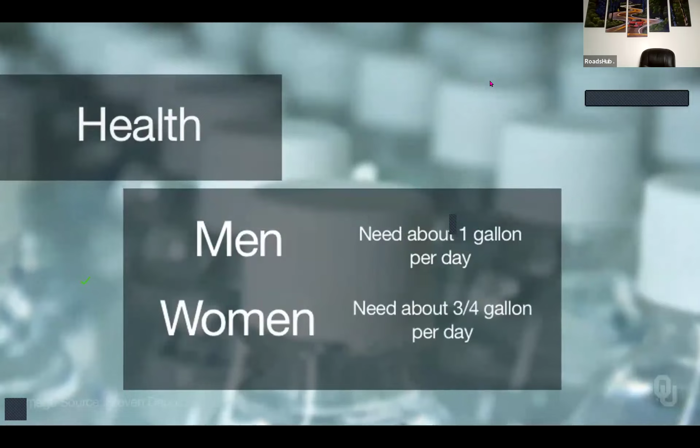These three categories are health, sanitation, and hygiene. Water is also used for cosmetic purposes when I shave or wet my hair to keep it in place. In fact, regarding health, men need to consume about 3.7 liters a day, or about a gallon of water, and women need to consume about 3/4 of a gallon. About 70 to 75% of our human body weight is water.

The blood is 82% water, the human brain is 85% water, and it is no wonder that some of the early symptoms of dehydration are fuzzy short-term memory, trouble with basic math, or difficulty focusing on small print, because your eyes use a lot of fluids to do their work.

What does water do in and for the body? It serves as a lubricant, forms the base for saliva, and forms fluids that surround the joints. It regulates body temperature, for example through perspiration, and helps alleviate constipation by moving food through the intestinal tract and eliminating waste products, making it a fine detox agent. Finally, it regulates metabolism, which is how our body gets energy from food.

So our thirst is a natural signal to our body that it needs water. And when people don't drink the water they need, the only other water they can get may be dirty water.

Water is used to do two things regarding sanitation: to dilute the waste and to move it to a place where it can be treated. For many centuries, before there were very many people on the planet, human and animal bodily waste could be released into a river or stream. When the waste is sufficiently small, water has enough volume to dilute the waste and render it harmless to people living downstream.

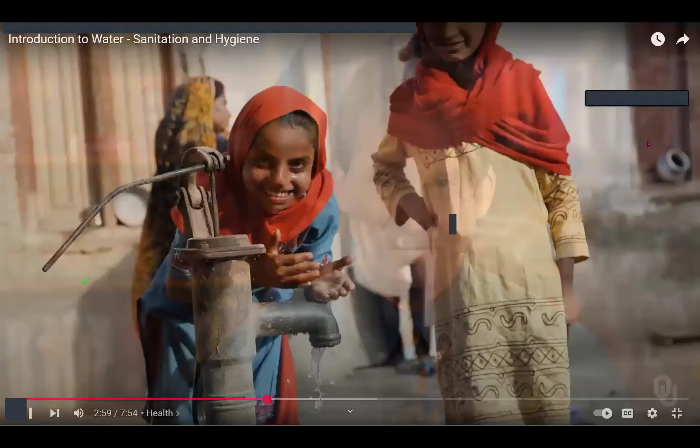The world and the amount of water it contains has and will forever be the same. It will not increase. But as populations have increased, it has become much more difficult to find enough water to dilute waste sufficiently. This is especially true in the industrial or developed world, with people moving into larger and larger cities, as you heard during the last lecture about London, Chicago, and Milwaukee.

This brings us to the second usage of water in sanitation: to carry waste away to a place for it to be treated or disposed of.

A very old system still in use today is called the septic tank and system. The water carries the waste by gravity from the home to an enclosed tank. There the solids settle to the bottom, and the liquid water flows out the top of the tank into a drain field where it percolates into the soil. There, natural bacteria in the waste and in the soil have time to degrade the waste and make it more inert, or safe. Septic systems can be very effective ways of using water to transport wastes, but only in places where population densities are small and there is plenty of land for the water to be spread out.

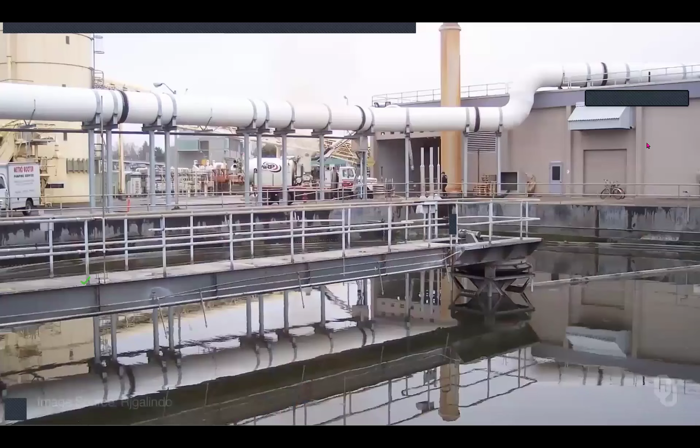A more modern system, used in large developed cities, is one in which water carries the waste to a centrally located wastewater treatment plant. There, natural processes are mimicked using engineered systems, in effect doing the same thing the bacteria would do in nature, in that soil we spoke about, but in a more controlled and speedier fashion. Once treated, that water can be re-released into a river, lake, or stream, where it will not have an adverse effect on the ecology of the water body or on people living downstream.

The third important category is hygiene. It refers to those practices that we do to maintain and preserve our health. Specifically, hygiene in the home and everyday life settings plays an important part in preventing the spread of infectious diseases.

Many of these practices require water: hand washing in the sink, proper rinsing of food, care and cleaning of domestic animals, and other practices considered proper hygiene, including bathing regularly, washing scalp hair, keeping hair short, wearing clean clothing, and brushing one's teeth. Some practices are even gender specific, such as those used by a woman during her menstrual cycle.

Hand washing is probably the most important single behavior that can be implemented in a developing country to reduce the risk of infectious diseases. Recall how every hospital has numerous hand washing stations throughout the patient care floors, and visitors are required to wash their hands before entering a patient's room.

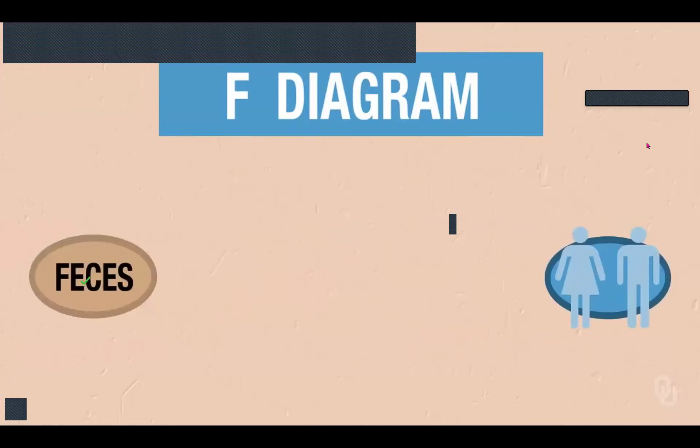Let's take a look at what is often called the F diagram. It shows various pathways that pathogenic, disease-causing bacteria can take from feces to future victim, that is, you or me. The fecal material, if not deposited in an isolated place such as a latrine or a toilet, can easily find its way into water, into fields where crops are grown, or onto the fingers of children who are playing. Finally, flies often carry bacteria from the feces to your food, which is why we often cover our food.

Some of these pathways lead directly to your mouth, as when you drink contaminated water or touch your dirty fingers to your mouth. Or they lead to your food, which of course leads to your mouth. Once in your mouth, you are at increased risk for the diseases that these pathogenic bacteria will carry.

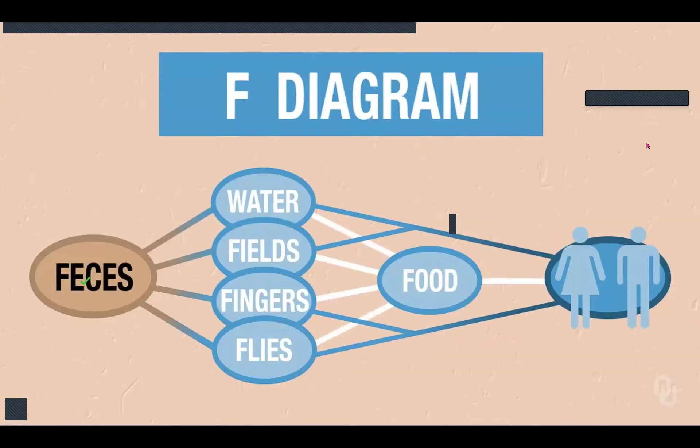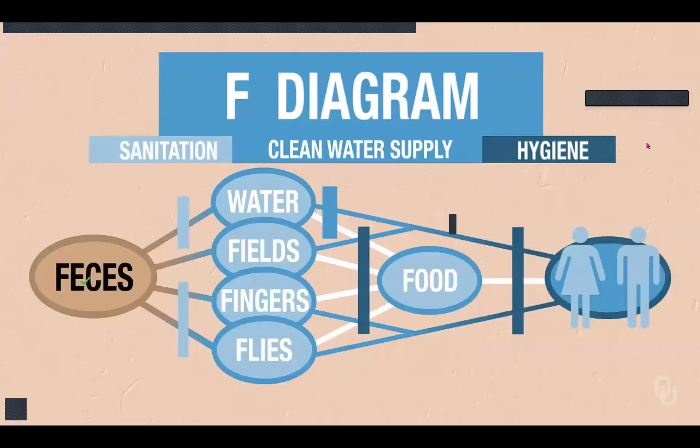It has been estimated that almost 1/10 of the global disease burden could be prevented by improving water supply, sanitation, hygiene, and management of water resources. That's all diseases. Childhood underweight causes about 35% of all deaths of children under the age of 5. An estimated 50% of this underweight or malnutrition is associated with repeated diarrhea or intestinal nematode infections as a result of unsafe water. Such underweight in children is directly responsible for about 860,000 deaths per year. But we'll talk more about these diseases in the next lecture.

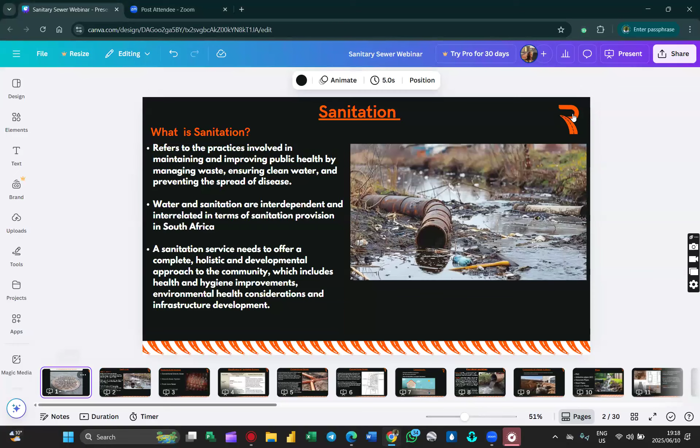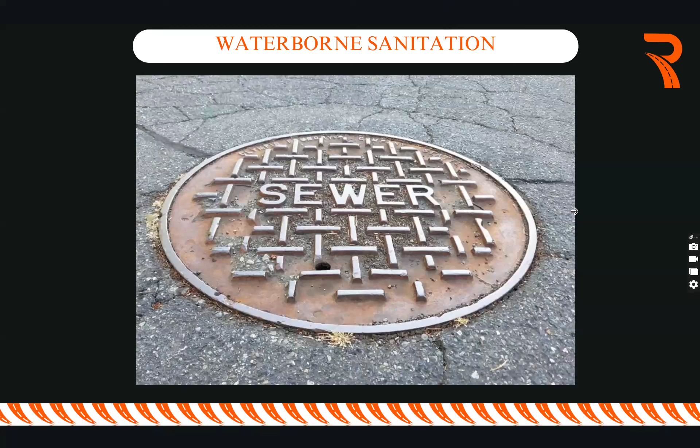So if you can see my screen, you can see that there is Waterborne Sanitation there, and you can see that manhole that is written sewer. Okay, thank you so much, Collins. I see someone putting a tick on my screen. Thank you, you can erase it as well.

I think that was a very good introduction from Engineer James when he was trying to engage you and ask you guys questions about sanitation. What is sanitation and why is it important? Why should we bother? Why should we think about this?

I like the statement that he uttered, that I always have this argument with some of my friends that are doctors. They think that their profession is more important than us. And of course, being an egotistic person I am and being an engineer, I also think my profession is important. Then I say to them, listen, if you make a mistake, one person dies.

I'm not saying life is not important, but if you as an engineer make a mistake, particularly in the area of sanitation, more lives are at risk. You'd realize that you compromise the health of generations, not only your generation, but generations to come. So let's say you're designing a sanitation system for an urban area, and you do a shoddy job, just give it a few years, your system will fail.

Whenever we design systems, whenever we design infrastructure, one thing that you also need to know as an engineer is that you're designing for something that is going to outlive your existence. Probably you're designing for 2 or 3 generations after you. So you also need to have a foresight of the impact that whatever project you're working on has.

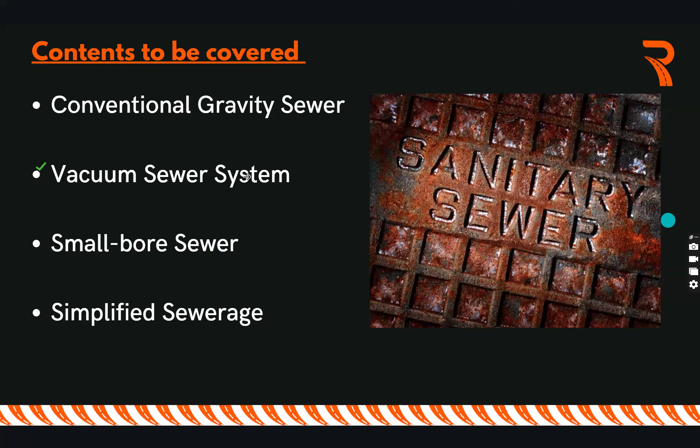Very soon we're also going to be talking about the employment of your sump and your pump station as well in the sector of sanitary sewer. It's also a big thing. How do you design a sump? How do you size your pumps, your rising mains, and all that stuff? It's also still part of sanitation. So it's quite big, but for now we're going to be talking about this. This is what we're going to be drilling deep into in this webinar.

Usually where water is not needed, there is what we call an on-site sanitation system. If you've grown up in the rural areas, or if you have families in rural areas - predominantly most of us are Africans, you probably have a rural area where your people come from - those places are less developed, and there's no access to water. Usually there's like one borehole that services the entire community, so water is not readily available. There is water in the community, but we do not have water that's readily available in your house where you can open a tap and there's water coming out.

So in that type of setting, we use what we call on-site sanitation systems - your pit latrines. I'm sure you guys are aware of these ones. I grew up knowing them as Blair toilets - I'm not sure if you guys are familiar with that term. We have pit latrines, ventilated improved pit latrines - there's a lot of technology going into that. But the most important thing you need to understand is that these are on-site, happening on site, because we do not have water.

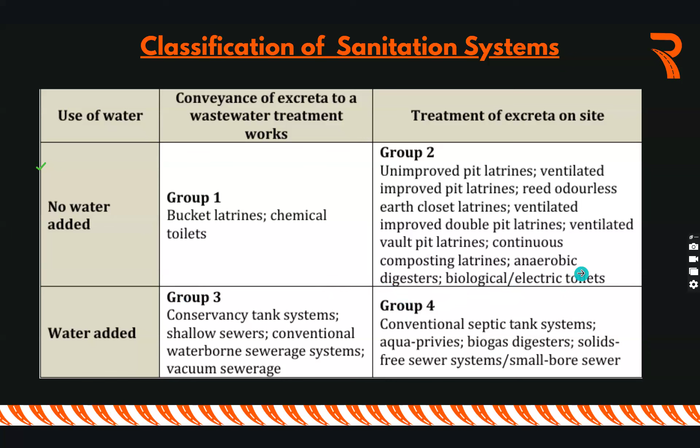Now let's start with conventional sewers. These ones are quite easy and quite straightforward. So a conventional gravity sewer system requires a water supply. Let me just quickly grab my pen - I need to be writing something here. Okay, let's take note: water supply.

So a conventional gravity sewer system requires a water supply, a sewer reticulation system, bulk sewer lines, and a wastewater treatment works. These are four things needed in your conventional sewer system. So we need a water supply connection - that's the first thing we need. We need to have an abundance of water. If we do not have a water supply, then we're not even thinking about a conventional sewer system.

As engineers, we need to start being creative and thinking about something. So if ever you've got your water supply, you know that, okay fine, there's a chance I can start thinking about a conventional sewer system. Then it would need you to design a sewer reticulation system - a network of underground pipes that carry that sewage from where it's produced to the treatment plant.

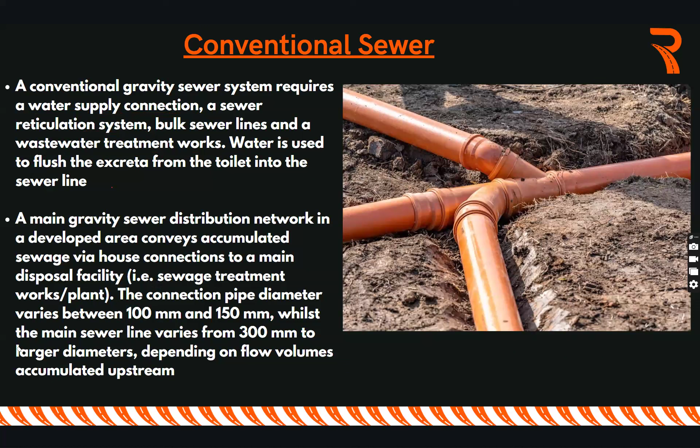So the moment you have water, you're now thinking, I'm just using a conventional sewer system. This is the most commonly used sewer system. I'm sure most of you guys know this — if you have been a WASH engineer before, or if you've ever worked in any design capacity doing land development projects, you have probably come across conventional sewers.

Usually, I'm sure you guys have seen a house plan before and seen the detailing of plumbing. These house connection lines are usually laid at a slope of 1:60. The sewer line on its own has no set slope that you can use. This is where you get into the details of design to see which one is the acceptable slope, depending on the manuals you are using, because you have to adhere to the manuals in your country. However, the science behind the water mechanics still remains the same.

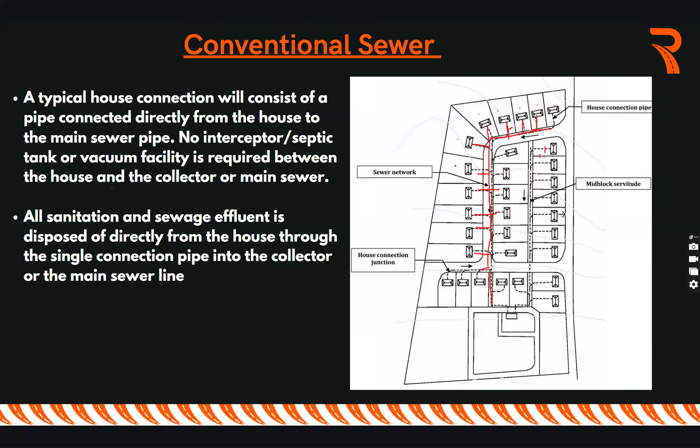There is also the gray water - the water you produce when you do your laundry, wash your dishes, or clean your house. You usually chuck all that water into the drainage. Most people throw it maybe into the garden to water their garden, but in most cases you throw that water into the drainage. So it will probably be connected by a pipe at a certain slope, that will then connect to the lateral sewer. So this is the sewer we're probably going to be dealing with - all the urban areas probably have this type of connection.

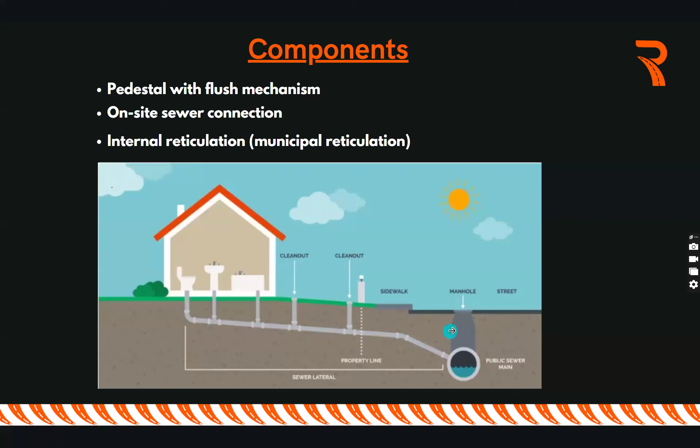So let's just quickly go through it. What are the main design guidelines? These are the three key takeaways that I want you guys to think about whenever you're looking at conventional sewers. The first thing is your cleansing velocity.

Your cleansing velocity. There is a minimum and a maximum velocity, with typical values ranging from 0.7 meters per second to 2.5 meters per second.

Now let me explain the concept of cleansing velocity. Remember, these pipes are laid underground. So once we lay them, we won't be having daily access to these pipes. So we have to design these pipes in such a way that they've got the ability to clean itself.

What does that mean? It simply means that there is going to be a moment where there is going to be sedimentation build up in the pipes. So we need to ensure that water is going to be moving at a certain slope so that there is no sedimentation build up. You understand?

So in the event that your system cannot reach cleansing velocity, sediments will build up. I'll give you an example. Like we are all in Africa. I've been, particularly where I lived, I actually grew up in low-cost housing. So what would happen, one thing that I've seen, particularly with mothers, is when they are scrubbing their pots, they tend to use sand or a special type of sand.

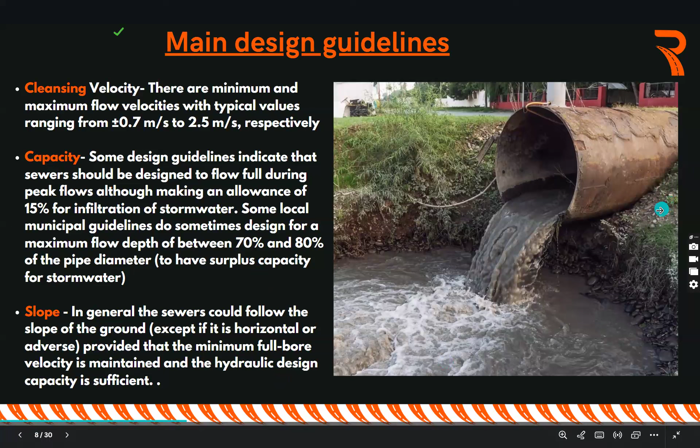So the reason why I'm spending more time on this one is because it's the most commonly used, probably that most of you guys are going to be interacting with.

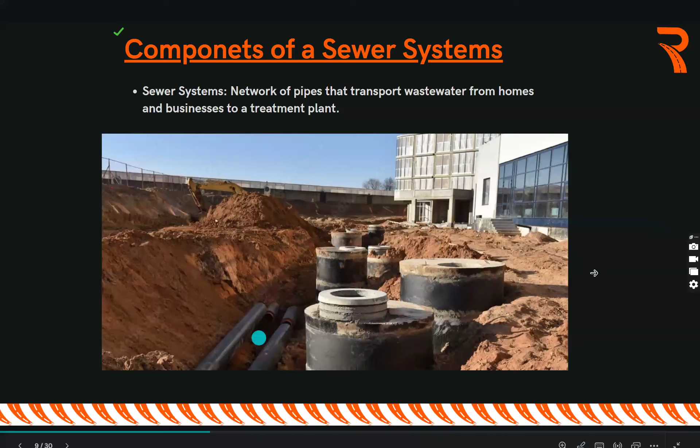Now, the components of your conventional sewer, you've got what we call your manholes. As you can see, these ones, you've got your manholes, and then you've got your pipes. So I'm going to start with the pipes. As you know, we've got a number of pipes that we use that are at our disposal. We've got PVC pipes, asbestos pipes, concrete pipes, steel pipes, cast iron pipes, glazed earthenware pipes.

Now, particularly from where I come from, mostly we are now using PVC pipes. They are mostly popular now, and glass reinforced plastic as well. It's becoming a lot more popular, particularly if you're doing your force mains and your trunk sewers. Asbestos, it's been a while - these are very old pipes that we used back in the day. I'm not so sure if they're being used currently in the system. Then you've got concrete pipes, usually for your trunk lines. Concrete pipes are usually used, but I've seen a lot more people move into GRP. Then steel pipes - there are certain situations where you can use steel pipes as well.

So one thing that you also need to know is that wastewater is not only sewage. So maybe you might be designing a sewer system for, let's say, an industrial area that is producing toxic material. So maybe PVC would do, or maybe steel pipes would do, or maybe cast iron. It depends on the type of project that you're working on. So these are some of the pipes that you need.

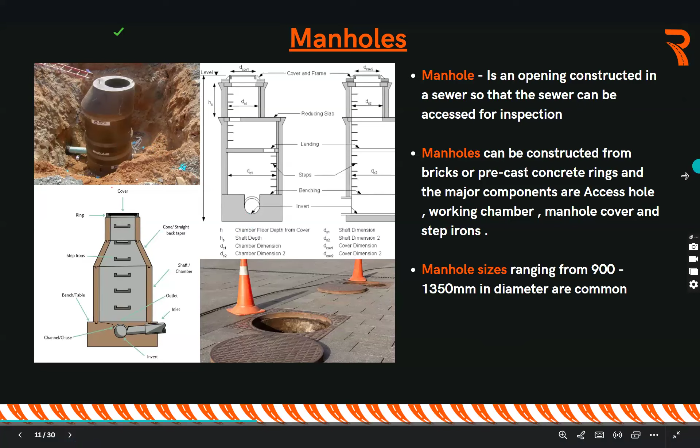Literally, most of us, all we do is we take a shower, and after we leave the shower, we don't even care where the water that we showered is going. We don't care. When you flush your toilet, you are done, you do what you do, it's very convenient. When you wash your dishes, you are done. There is no 'okay, I need to fetch water, I need to do this.' It's very convenient, that's why it's mostly preferred in the urban areas.

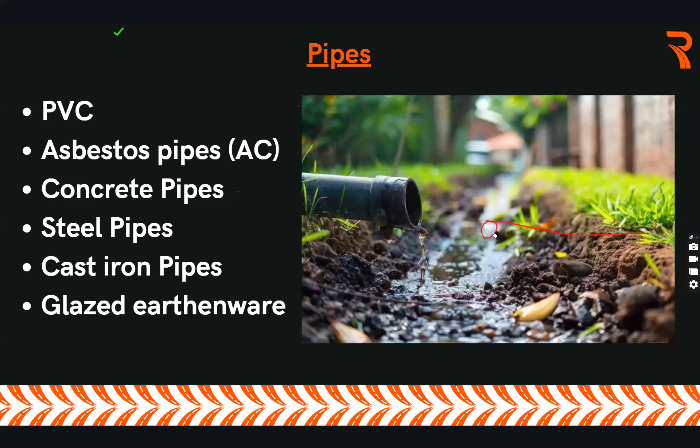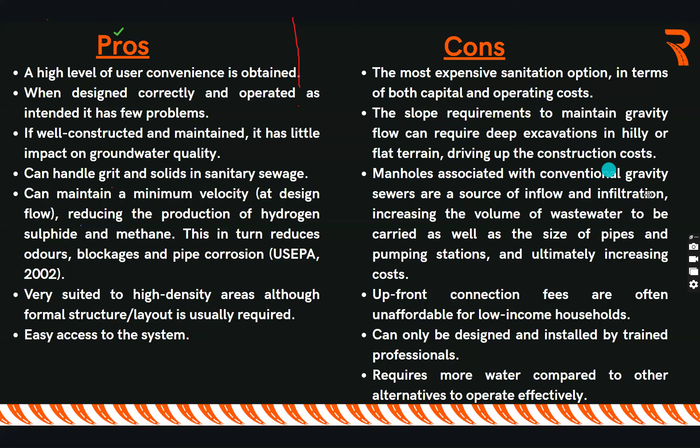For instance, I learned how to design a road using Kenyan manuals, and I'm quite comfortable even in my own country using Kenyan manuals, and I built on that. When I started using my own South African manuals, SANRAL and other manuals, I built on that too. But it's still the same - the concept of design is still the same.

I took a lot of time with that one, so I'll probably try to run through this. Then we have got vacuum sewers, right? I don't know if any of you have heard about vacuum sewers, but I was actually reading a very interesting project where they employ vacuum sewers. Let me just quickly run through this.

So vacuum sewers use what we call differential air pressure to move the wastewater. A central vacuum pump station is required to maintain a vacuum, a negative pressure, on the collection system. So as you can see, you have a house connection here, then your sewer goes into sort of like a pit sump - you've got a sump already in your house.

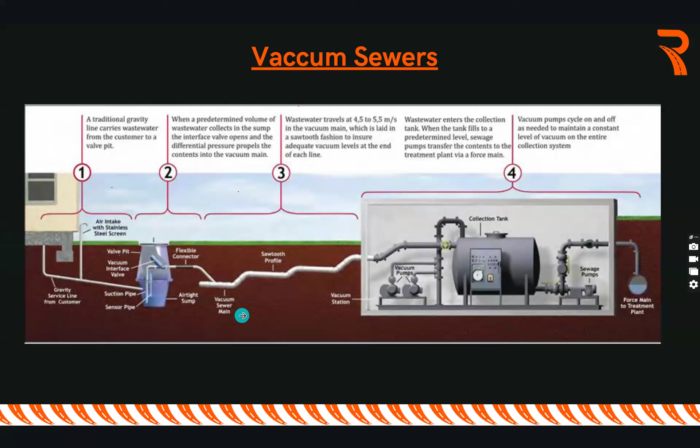Now that sump will be connected to a vacuum pump. So because of the negative pressure created by the vacuum pump, your sewer will move into the collection tank. Now, as you can see, there's a lot of moving parts there, and you can also see that it's capital intensive, because we have vacuum pumps and each house has to be equipped with a sump that temporarily collects the water, and all these other things.

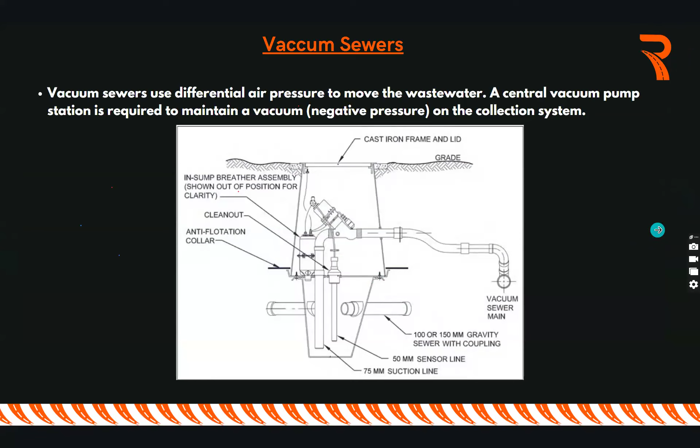So one of the things you need to know is that it's not a very common application for a sewer system, but you also need to understand where it's most applicable, because remember, for conventional sewers, we said always follow the slopes. So what happens when you go to a place that's relatively flat, or very rocky, or the soil is unstable?

Let's say you want to do a sewer system in the desert - the soil is unstable, or it's a rocky or flat terrain, like in the Cape Flats, which is very, very, very flat, or in an area where there's a high water table.

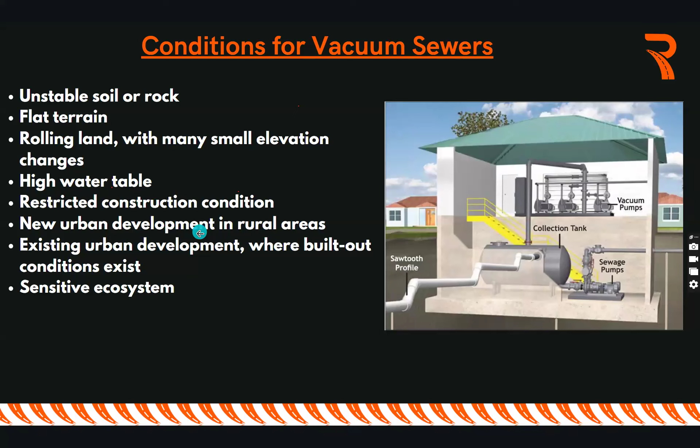So these are the conditions for vacuum sewers that you need to know. The ones that are most obvious, like I said, are flat terrain, unstable soil, high water table. Those are some of the things that you need to know.

So vacuum sewers, I'm sure you guys have heard about this site in Palm Jumeirah in Dubai. I was actually watching a documentary sometime last week on how they built this. This is an artificial island. Because it's an artificial island, they had to import about 4 million metric tons of stone and remove some sand. All of this was just water here, so they artificially made all of this.

As you can see, there is no slope in this particular area. This is just an example I could find on the internet. It's relatively flat. In these type of instances, they actually use vacuum sewers. I also see mostly island areas use vacuum sewers because it's also flat terrain, and most of them probably have unstable soil as well. So most of the sanitation they can employ in that particular area is vacuum sewers.

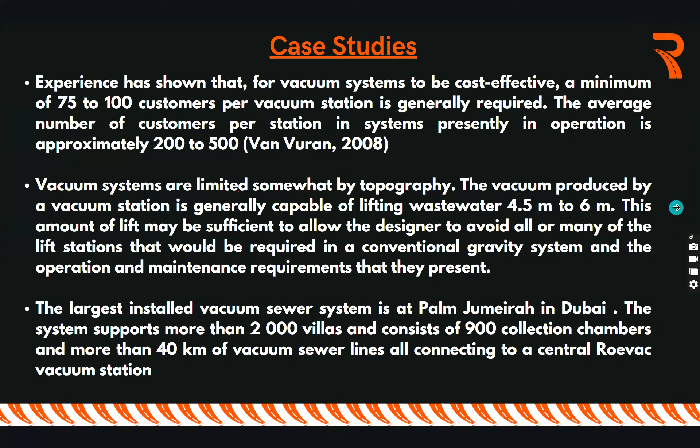So this is just a case study that I came up with. I'm not going to go much into detail on that one, I just wanted to share that with you guys. Should you need the notes, you can reach out to our captains, they should be able to provide the notes for you. There are pros and cons to everything as well, so I'm just going to speed through that one.

Now this is one I also want to talk about because it's mostly applicable to us in Africa: small bore sewers. I've actually done this one, that's why I'm passionate about it and wanted to share it with you guys. Small bore sewer systems, or small diameter gravity sewers, are also called solid free sewers, or septic tank effluent gravity sewers.

Excuse me, someone has their mic unmuted and it's distracting me. Vincent, can you please mute your mic? Vincent, if you can hear me, thank you sir, thank you.

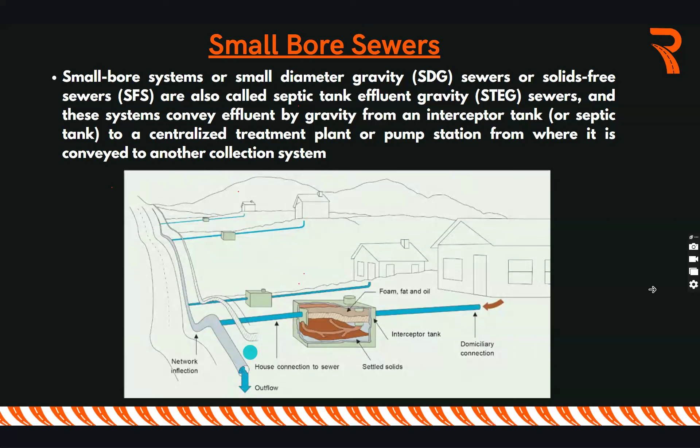You need to understand that small bore systems, also called solid-free sewer systems, are a system of effluent conveyance which uses an on-site tank to settle solids out of the sewage and conveys the liquid effluent only to a central treatment or disposal point by means of a sewer network. Just like in the conventional system, there's a network of pipes, but now the pipes are not transporting solids. The solids have already collected in your septic tank in your house, wherever you have it. The on-site tank could be a septic tank, an interceptor tank, an aqua-privy, or an anaerobic digester - you can choose.

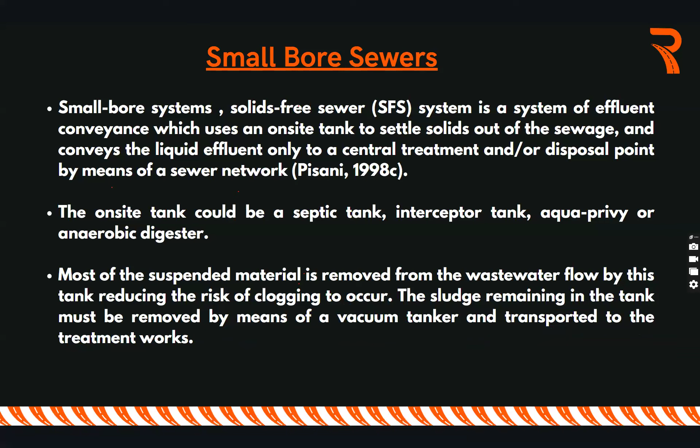But mostly we usually go with a septic tank or an interceptor tank. Most of the suspended material is removed from the wastewater flow by this tank, reducing the risk of clogging. The sludge remaining in the tank must be removed by means of a vacuum tanker and transported to the treatment works, just like how you empty a septic tank using a honeysucker.

So the difference between a small bore system and a gravity system is the inclusion of a septic tank or interceptor between the house and the main sewer distribution line. The interceptor tank prevents gross solids from entering the main sewer. The connection pipe that conveys effluent from the house to the tank is typically 100 to 150 millimeters in diameter.

Now this is a very important point, I want you guys to pay attention. Unlike conventional gravity sewers, which are designed for open channel flow, small bore sewers may be installed with sections depressed below the hydraulic grade line - that is, you have adverse slopes. Thus the flow within the small bore sewer may alternate between open channel and pressure flow. The system pipes can therefore be laid at flat gradients since they do not carry solids that require transportation at scouring velocities.

So these are some of the advantages - if you're in a peri-urban neighborhood, a relatively not so rich neighborhood, or maybe you've got a small budget to deal with sanitation in that area, we can literally go for a small bore sewer. Each house can then come with the condition that if you're building your house, you have to build your own septic tank. The septic tank is not very difficult to build, just brickwork, cement and concrete, and we are done.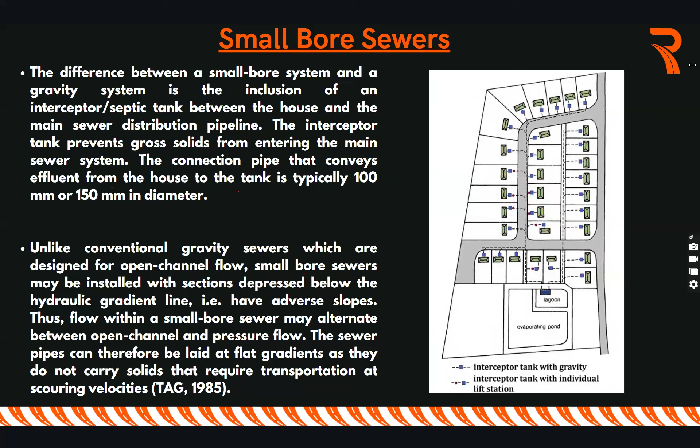So main design guidelines: we've got the hydraulic design, the design flow estimates. The sewer must be designed to carry an expected peak hour flow. There is less inflow, and attenuation is created in these interceptor tanks, so the average daily wastewater flow per capita is approximately 190 liters per day per capita.

Now the collector mains, we have the layout. Small bore sewer distribution systems are often installed in front of the properties underneath the pavement. Then the alignment and grade.

The horizontal alignment does not need to be straight, meaning it can be installed to avoid obstacles. By obstacles, we mean it can go under the hydraulic grade line and also go up, unlike conventional gravity sewers where we need to maintain a steady downward slope. Here, if we have an obstacle, this is where we can use what we call an inverted siphon. Just look it up, it's quite interesting.

So with a small bore sewer system, we can use inverted siphons. We have the license to do that because we don't have that much solids, less than 5%. We have very little solids in our systems, so we're good, we can get away with it.

So the vertical alignment does not need to be uniform, provided the hydraulic grade line does not need to rise above the upstream of the interceptor tank outlet invert during peak flow conditions. This is primarily because we don't have solids, so this is a huge advantage at our disposal.

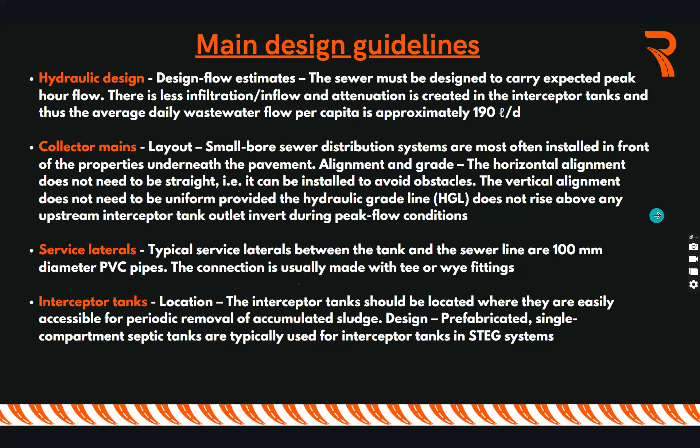Then you've got your interceptor tanks. I would prefer to just use septic tanks. These should be located where they can be easily accessible for periodic removal of accumulated sludge. The guys running honeysucker businesses are probably going to have a lot of money in this scenario, but I do favor small bore systems. I'm quite passionate about it, given the amount of pros it has against the cons it might have.

So it can have a low flush. Low flush can be used since the solids only need to be conveyed over a short distance.

You can also employ this in an area where there is not a lot of water. That's why I'm emphasizing this peri-urban area, because sometimes in the communities I work with, they've got intermittent water supply. They don't have 24/7 water supply like people in urban areas. In some rural communities in South Africa, we're having only 2-day water supply for the entire week.

So think about it. If I do a conventional sewer system for a neighborhood that receives water only 2 days a week, your system is going to fail. Just think about that. Why? It's because we do not have enough water.

So what happens in the other 5 days when there are no peak flows? Because if there is no water, there is no peak flows. Everybody is using water conservatively, so there's not enough flushes going into the system. We don't have excess water to carry the solids or sediments downstream. So during the 5 days, the sediments accumulate, and maybe that 2 days is not enough to produce enough water to move the sediments downstream.

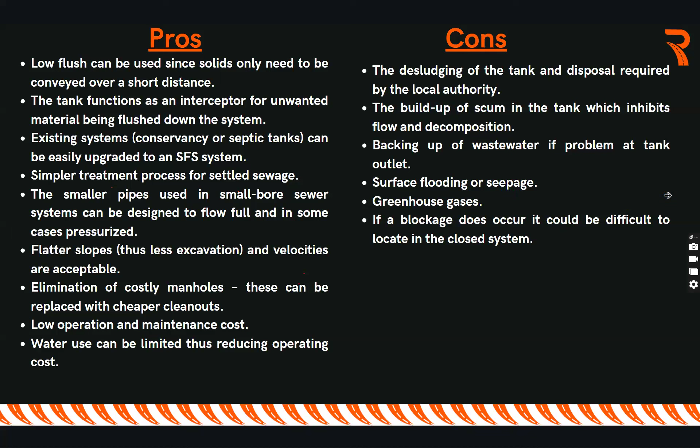So this is very important, that's why I wouldn't go for interceptor tanks. I would just say let's go for septic tanks because it also solves the treatment question. It partially treats the water because there's a lot of biological processes happening within the septic tank. By the time the water leaves into the system going to the treatment plant, it's been partially treated, so it saves a lot. This is my favorite when I'm working with low cost housing in peri-urban areas. I always go for the small bore system.

For the technical design standard, someone was asking me - in South Africa we've got an organization called the CSIR. It's the hub of mostly all the research that goes on in Africa. They did a couple of researches, and those are also the manuals that I read. They're quite good. Also, especially when you're designing infrastructure like sanitation, there's a lot of stakeholder consultation required from your part, because you have to understand the economic situation of the people you're designing the system for - their culture also plays a role.

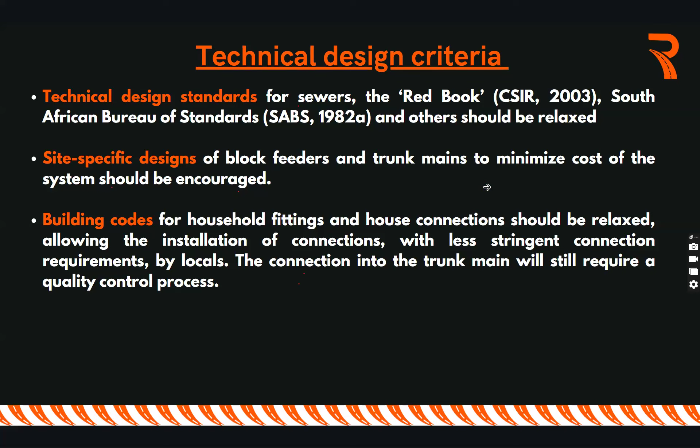So that then plays into the decisions we have to make as engineers - should we go for the conventional system? It will probably fail because it is going to be clogged. If we go for the conventional system, we have to design it so the council has the equipment to periodically clean, operate, and maintain the system, which raises the O&M costs exponentially. So stakeholder consultation is important just to understand the basics of how those people live.

A shallow sewerage system, or simplified sewerage system, is an offsite sanitation technology that removes wastewater from the household environment. Conceptually it is the same as the conventional sewerage system, but with conscious efforts made to eliminate unnecessary conservative design features to match the design standards of local circumstances. In layman's terms, the conventional sewer system is like the official system we know - this is like the unofficial sewer system. For instance, there's already a housing scheme existing, but we need a way to deal with the sewage system.

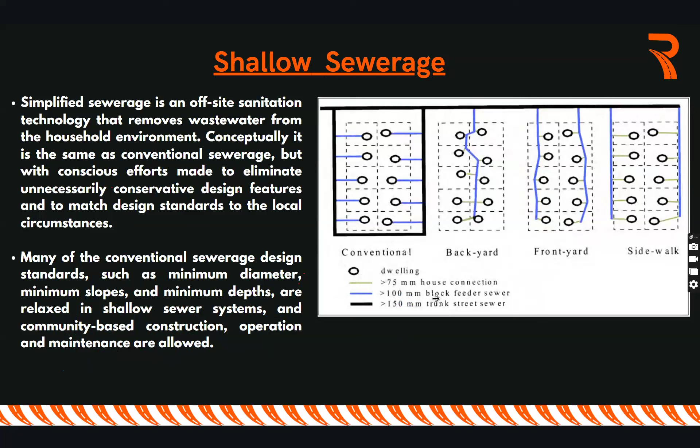So this is more of a community-based system - it's simplified in the sense that it's coming out from a conventional system, but it's more simplified, more of an unofficial system, in quotes. You'd realize that the block feeder sewers are arranged in either of three positions depicted in the figure, and as you can see, this usually is the backyard.

Or mostly known as the mid-block section, right? Where you're saying, okay, this will probably be your road, and your sewer line will probably be sort of like threading the needle in between the houses. As you can see, it's not straight like the examples we've seen earlier. It's going in such a way that it can connect to the houses, turning where needed. So the minimum diameter of the block feeder pipes is usually 100 millimeters.

The block feeder systems are different from conventional street sewers mainly in three ways: the pipe diameter, 100 millimeters versus 150; the gradients, 1:67 compared to 1:60; and inspection chambers are used instead of manholes. So this is a very simplified version, imagine taking a conventional sewer system and using it in a simpler way.

So the applications, somebody might be asking, okay fine, what are the applications? Maybe in an area like this, a low cost housing scheme, where there's already people living there but we need a way to deal with sanitation. We can just have a very shallow sewer system in that area to remove the wastewater, then probably have stabilization ponds so that you can partially treat it before disposing it into the river.

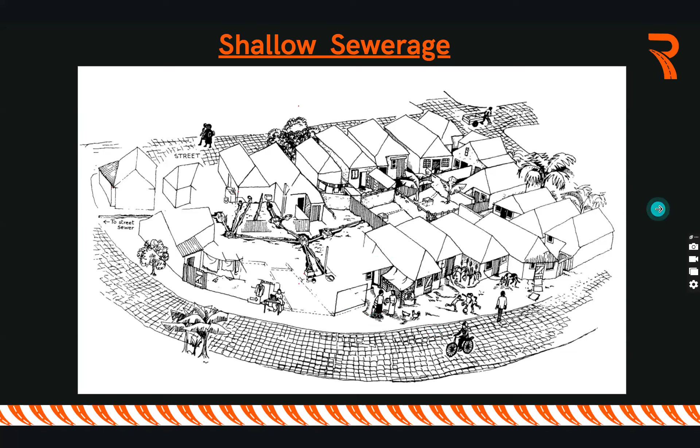The main design guidelines: the minimum cleansing velocity in shallow sewers is 0.5, different from the one proposed for the conventional system. The pressure of the water backing up behind the solid in the smaller pipe flushes the solid down the system, and this is the main reason for relaxing the minimum self-cleansing velocities. Based on acceptable practice, a minimum flow depth of 20% of the pipe diameter and a maximum flow depth of 80% is suggested. Shallow sewers use 100 mm piping where possible, only increasing when estimated peak sewage flows require it.

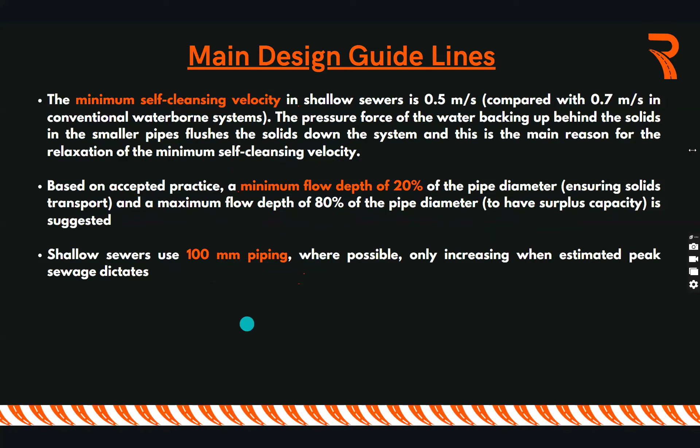So yeah guys, those are basically the four main systems. They're not the only sewage type solutions out there, but these are the four that I wanted you to know, the ones commonly used in our urban areas. These are more of your off-site sanitation systems. Maybe in the future we're going to talk about on-site systems, and also about the wastewater treatment plant, how you deal with the waste now that you've taken it up.

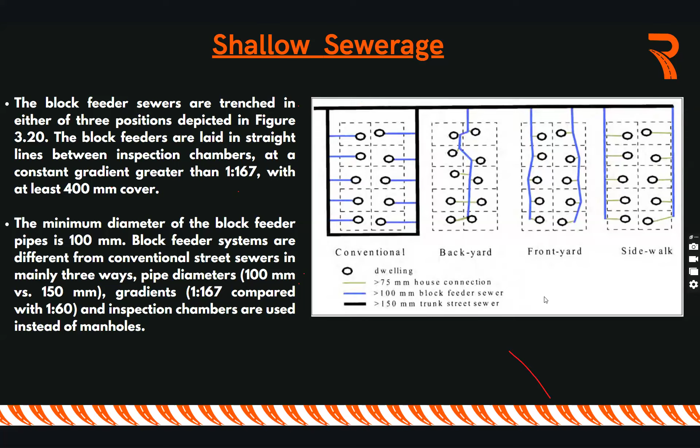So yeah, I think those are the only questions that I have. Yes, those are the only questions. Hello, yes engineer. I'm going to take the last one because we're over by 13 minutes. Yes, you can ask. How are you, Engineer Bill?

I'm very well, thank you. Maybe mine is just to table an observation about the septic tanks.

I think septic tanks are prone to leakages. Some years back I was engaged in research about underground water, and I sampled an urban area in Kenya named Juja. In this area I sampled 5 boreholes, the shallow wells, and I found there was contamination of E. coli in the boreholes, which means there were several leakages from the septic tanks.

So I don't know what you can comment as an engineer about the functionality of septic tanks because of the leakages. I think they contaminate the groundwater. So I don't know what's your view about that.

Also I have a question about cost benefit analysis. For the case of a water service provider, after how many years can we say that the sewer is generating some income, comparing the cost of maintaining the sewer system with the income generated from the same sewer system? So I have those two questions: the leakages of septic tanks and how they contaminate groundwater, and the cost benefit analysis of the income of the sewer. Thank you.